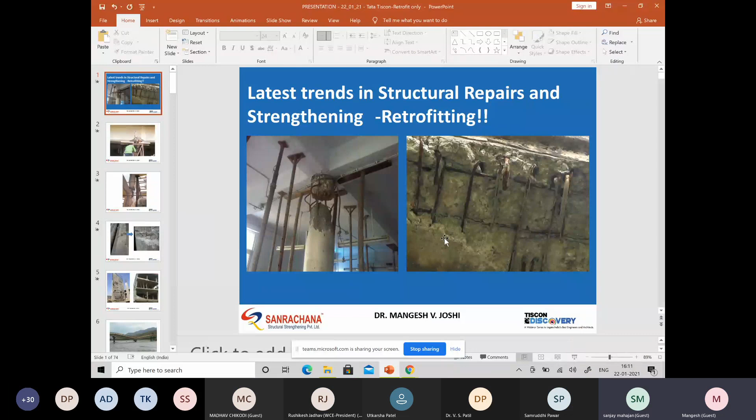Can you see the screen now? Yes, sir. So...

Structural repair and strengthening is the topic. I'll be talking for 45 minutes, focusing mainly on the strengthening part. We've been doing this work for almost...

Can you mute yourself like others? Hello? Please mute yourself, there's a lot of disturbance coming.

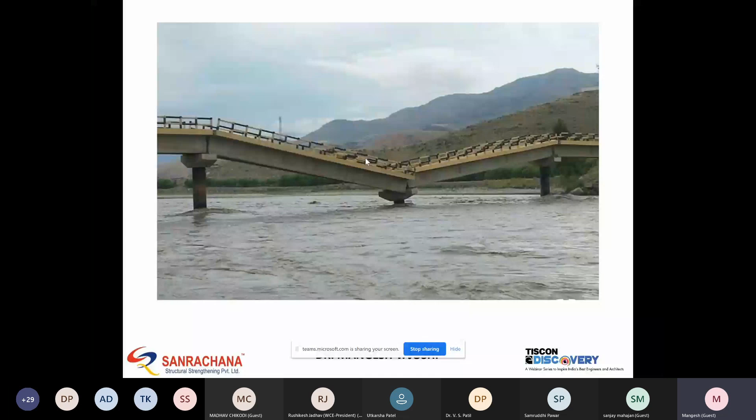So what comes to mind when you see this, and why does this incident happen, and what is common in all these photographs? Basically, one common thread in all these photographs is total negligence - meaning we are not taking care of or maintaining our infrastructure, or there might be some mistake in design. So there are different causes for all these types of failure.

Going back to this case - the structure was not properly maintained and there was overloading, so nobody checked the capacity before heavy vehicles went on the bridge.

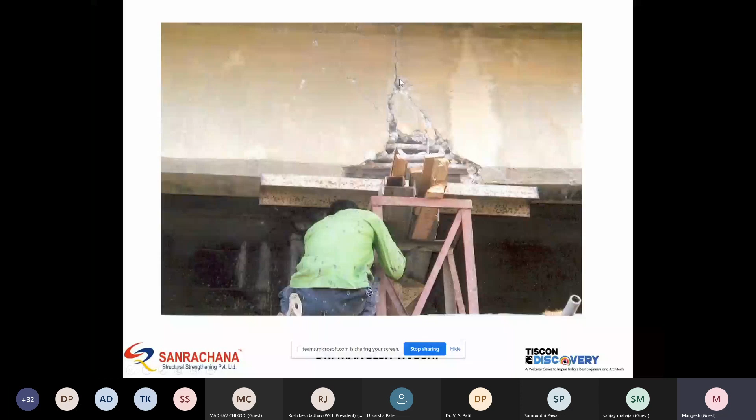In this case, you can see there are no cross-links here. Normally, as per good earthquake detailing, there should have been stirrups here, but you can see there are none. So naturally, it is failing at this location.

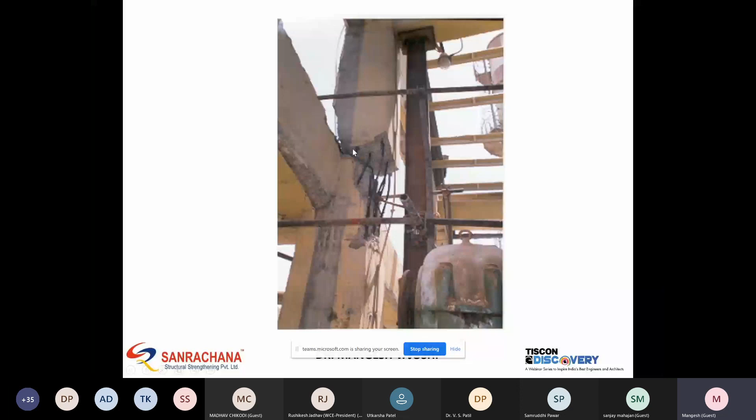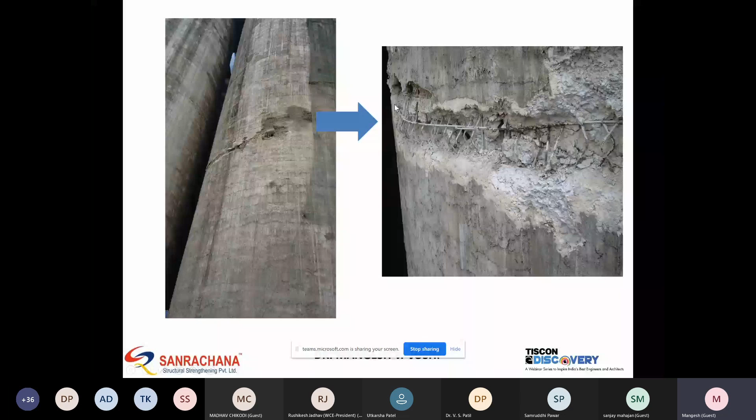In this particular case, you can see extremely bad quality of concrete, coupled with design issues, leading to this type of failure. Here again, bad supervision and bad quality control on the concrete led to this type of failure. And here, it is covering - again, inadequate design.

So what we are going to study here today is mainly why we need repairs and retrofitting. I'm skipping these two parts given the time - durability I'm not considering, because durability itself is a very elaborate subject.

We will discuss different strategies for repair and retrofit, and the most advanced updated strengthening techniques. I'll be talking mostly about case studies, because that way we'll be able to relate to the practical problem of how things happen.

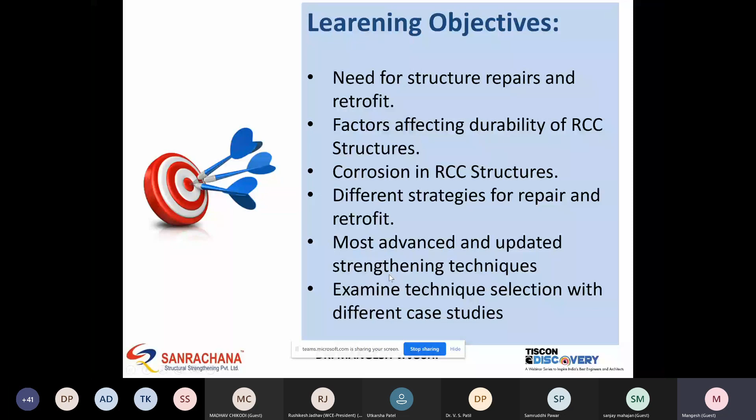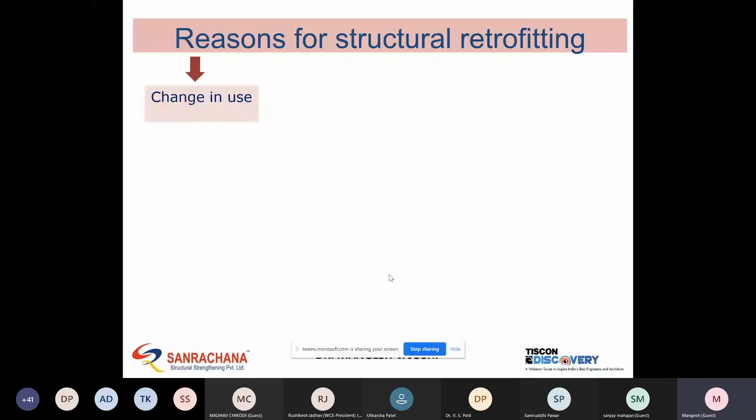So why do we need structure strengthening? There are different reasons. First is change in use, which might be for different reasons, mainly live load increase. Many times you convert a residential building into a commercial building, and by that there is an increase in live load, because for residential building it is 200 kg, and for commercial building it is 400. Similarly, if you convert a mall to a hospital, there is a change in importance factor, and accordingly your forces change.

In case of industry, there is always a rearrangement of equipment. If you put some heavy equipment which is beyond the capacity, so this can be done.

Seismic retrofit: structures which are not designed for current seismic codes can be considered. Or blast upgrade, meaning buildings which are subjected to, or which are posing a threat from blast.

Those buildings deteriorate because of corrosion, loss of section, cracking. Corrosion is keeping us very busy, because especially India has a long coastline, and because of that you see a lot of corrosion, and whenever a structure corrodes, it loses its structural properties also, and because of that there are many stability related issues.

Faulty construction: when I started in this segment, I never thought I may end up working on new structures, but because of the peculiar situation in the market and lot of structures and work happening around, naturally more work is happening, so mistakes are also equally happening. Sometimes there's missing reinforcement, incorrect reinforcement detailing, low concrete strength, issues with concrete mix. Sometimes you specify M40 grade, but at site you get M20 only after hardening, and demolition is not always possible there.

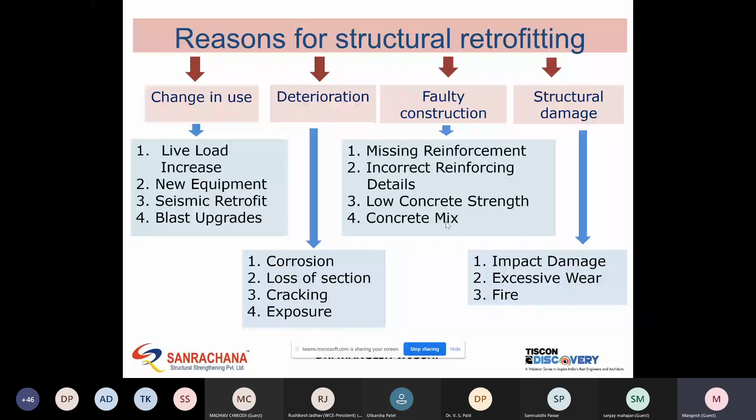I always say that designing a new structure is a very straightforward job, quite straightforward activity. You have a new construction, so you have a functional and structural demand clearly specified. You know for what load it has to be designed. You can follow the code. Everything is greenfield, you can start from scratch.

Before actual construction starts, you can do a lot of engineering. You can spend a lot of time with the architect, doing detailed engineering. You can come up with different economical options in terms of construction. And after doing this detailed planning, you go for construction. So it is very biased towards planning.

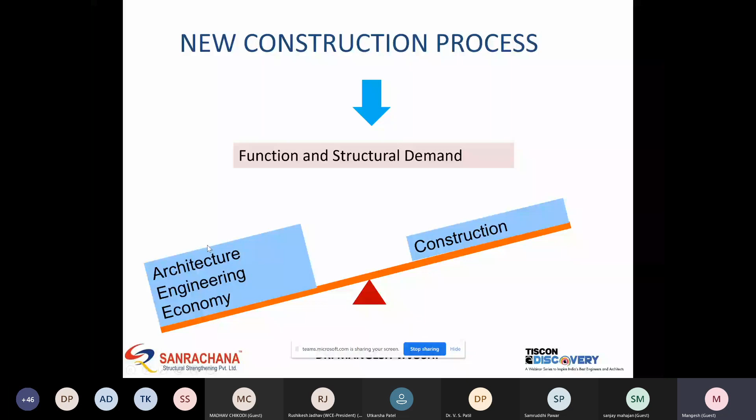But when it comes to retrofitting, you have an existing capacity, and from this existing capacity you have a new demand, and you have to achieve this through the process of strengthening. So from existing capacity to new demand - this process is strengthening. But it's not as simple as it looks, because it's quite complex and follows a very tedious path.

Because once your structure is brownfield, there are services, and we need to remove these services. We need to take a shutdown. So a lot of issues are there.

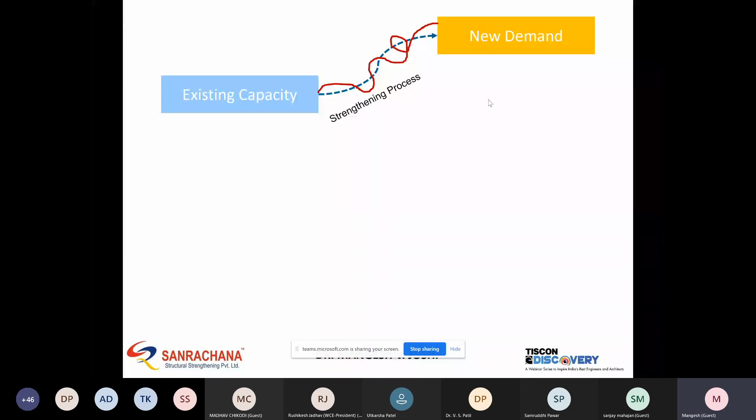So what happens in case of retrofitting? You need to focus first on constructability. Like yesterday, I visited a plant, and they told me that if they keep the plant shut even for one day, it will cost them 3 crore per day. So even if I can save one day of shutdown, I'm saving them 3 crore rupees. So we have to spend a lot of time on constructability.

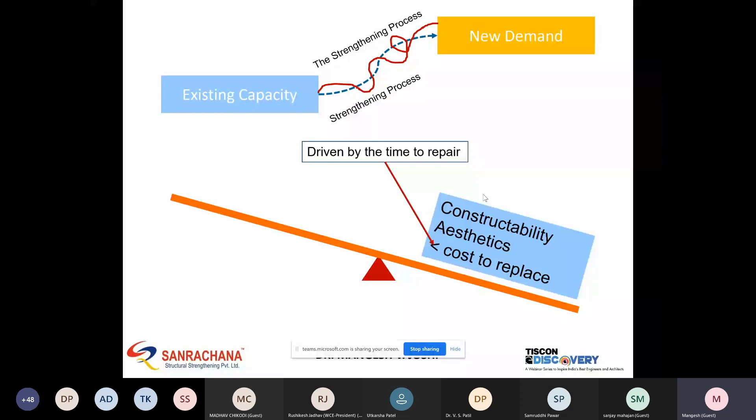As I said, it's driven by time to repair. Sometimes even your initial material cost is very high, but your shutdown cost is much higher than that, so your basic material cost doesn't matter. In this case, you have to spend time first at site, see the different aspects, the limitations, and then it should be supported - whatever you do should be supported by your engineering.

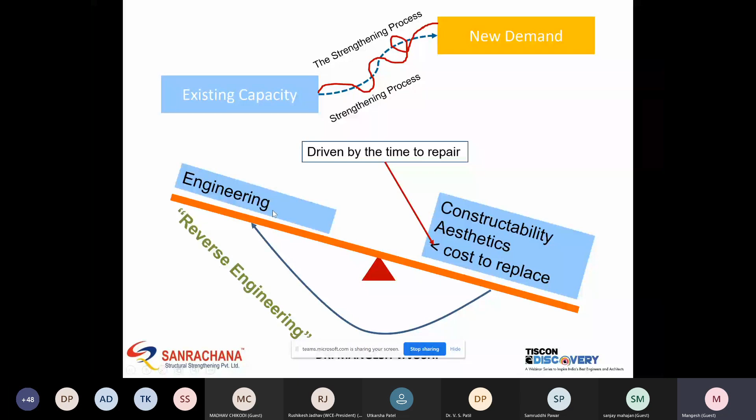So typically, retrofitting I call a process of reverse engineering, meaning you start from site and go to your office desk.

So as I said, I am mainly focusing on structural strengthening. Here are the different techniques currently available in the market. First is a very popular and very old method - supplemental steel and steel plate bonding. Then external bonding with FRP - now I will not call it a new method because I myself have been using it for the last 20 years. So this method has been in use for almost 20 years.

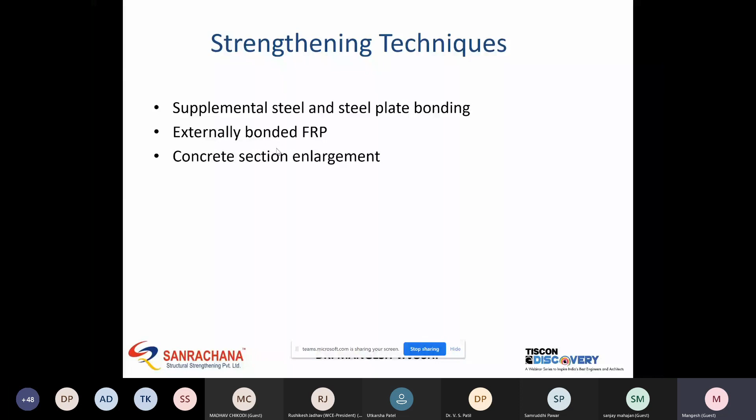Then concrete section enlargement, again a very old method called jacketing, in which you increase the area of cross section by adding additional steel and additional concrete thickness.

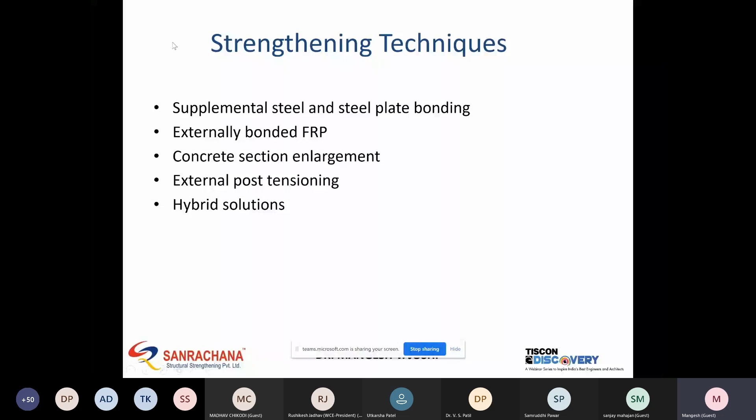External post-tensioning means, whenever you might have seen many bridges where external ropes are provided to take care of this additional load. Then comes the hybrid solution, which is comprising of all this mix. In the next slides, we will see the advantages, disadvantages, and mainly case studies of what all we can do here.

If you see the percentage use as of now in the market, FRP contributes only almost 50%, and the rest contributes the other 50% of the solution. But again, solutions are driven by site condition and different parameters which you are thinking of.

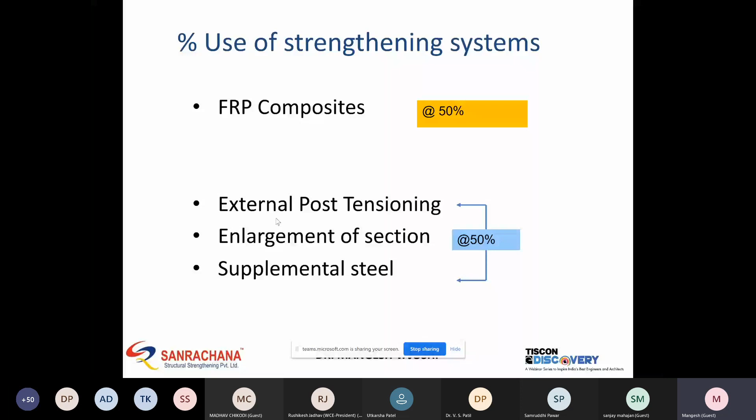Again, there are different approaches in retrofitting. The first approach is increasing stiffness, wherein you will increase the cross-section area or do the wrapping. In the second approach, you provide dampers, wherein you can reduce the exposure of forces on the element by introducing dampers, so that your structure element is not subjected to higher forces. The first is more of an active method, and the second is more of a passive method where we are reducing the load on the element.

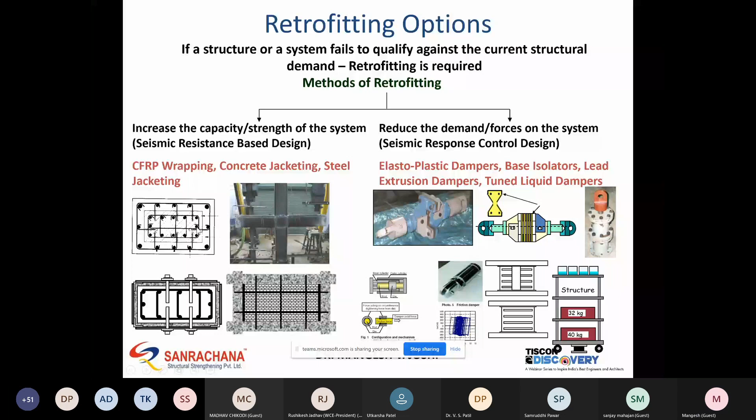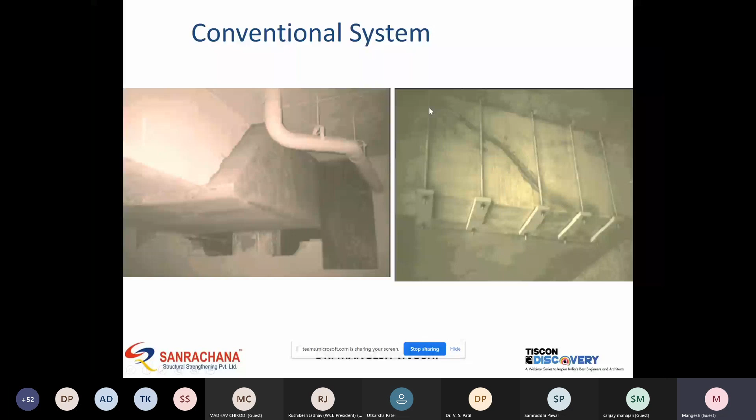Then there are different methods. In conventional methods, you can increase the cross-section area by putting additional steel and then concreting, or do external post-tensioning for this type of shear crack. But then we have our composite materials, and as I said, we ourselves have been using composites for the last 20 years, but it all started with the defense industry, because all your fighter planes are made of carbon fiber, your missile shields are made of carbon fiber.

Why carbon fiber in the defense industry? Because these are non-metallic fibers. Being non-metallic, radar cannot detect it, so that helps. Again, it is very light and strong, so it reduces the weight of aircraft to a great extent. Then for sports goods purposes, where you need light but strong materials. So all these materials started their use in the defense and sports industries.

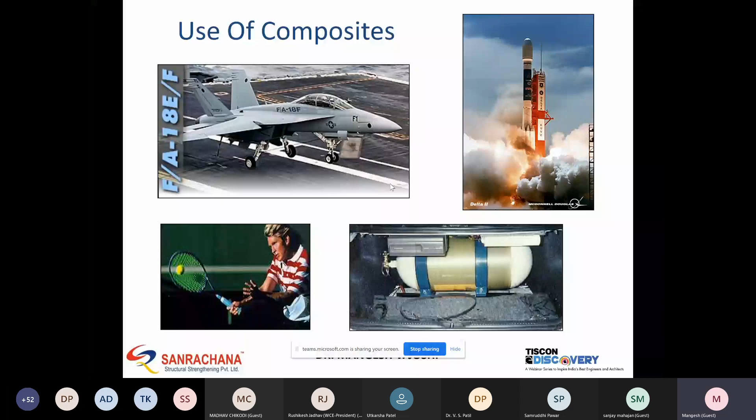As the market opened up and there was a huge supply of the material, they started using it in the construction industry also. Like composite, the best composite civil engineers know is RCC, where you use steel and concrete in combination. Like this, we also have a combination - we have a fiber phase and a matrix phase. In fiber, we have different types like carbon, glass, aramid, boron. And in resin, mainly thermoset resin. If you mix this fiber with resin, it forms the composite.

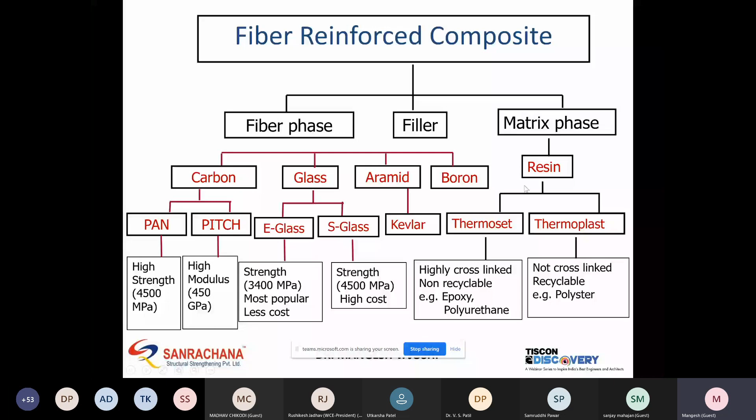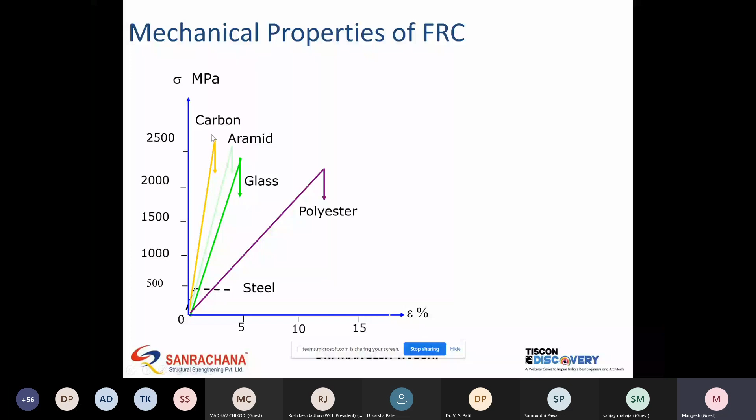If you see the mechanical properties, it is very peculiar. On the x-axis there is strain, on the y-axis there is stress. If you see the stress-strain diagram of steel, it is very bilinear - you can see it here, elastoplastic material steel, once it yields, it goes into this plastic zone. So it doesn't break at this point, it yields before it breaks. Unlike that, all these materials are elastic, meaning they don't have a plastic zone. In the case of carbon, this breaking point and yielding point are the same - it doesn't have this longitudinal plateau. So at material level, these materials are brittle, but you can see its strength is much higher, as I will show in the next slide.

One more property is its orthotropy. Whenever you design an RCC element or steel element, you consider that element as isotropic and homogeneous - meaning your properties are the same in all x, y, z directions. But that is not the case with composite - it is a highly directional material. All fibers are oriented in one direction, making it very strong in that direction and weak in other directions. So you have to be very careful at the time of application, in which direction you need to orient your fiber. This is called unidirectional fiber, UD fiber.

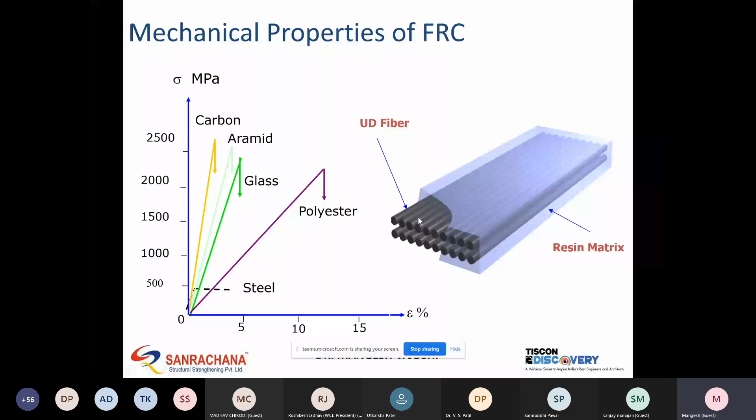These are available in different forms, like this type of cloth sheet, where you have a complete cloth of say 500mm wide and 100 meters long, and once you mix it with this epoxy, it will form a composite. Or you have ready-made profiles of fixed width and thickness - these are factory-made laminates, and you can directly paste this composite like a steel plate, or bolt it to concrete.

How can we strengthen the element? First, for flexural enhancement, you can put the fiber in the vertical direction for a column, and for shear you can wrap with 90-degree orientation. If we require both flexure and shear, we can wrap in both directions.

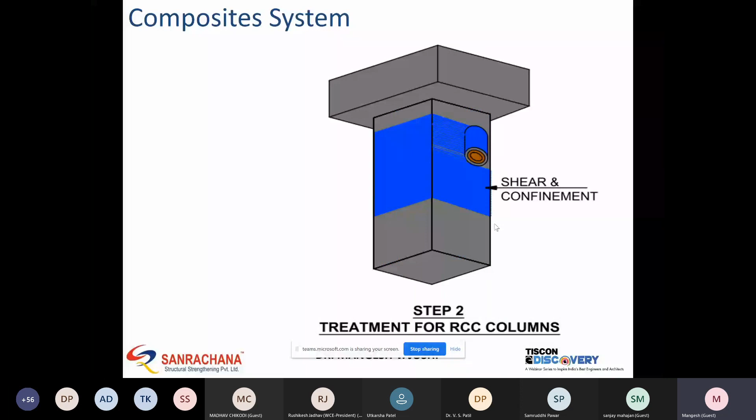Similarly, for beam, you can wrap in this horizontal direction for flexure. For shear, you have to put the main fiber direction parallel to stirrups, because your shear force is going to come in this vertical direction. If you have both issues with flexure and shear, you can wrap in both directions.

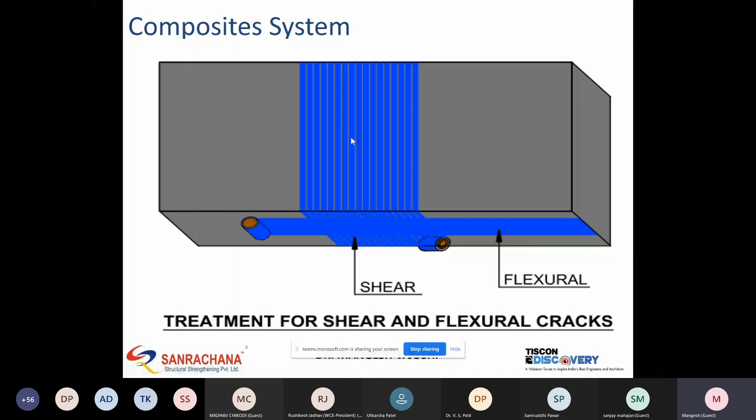Similarly, for a one-way slab, you can wrap in one direction. If it is attracting some negative moment at top, you can wrap from the top also. If it's a two-way slab, you can wrap in both directions, X and Y.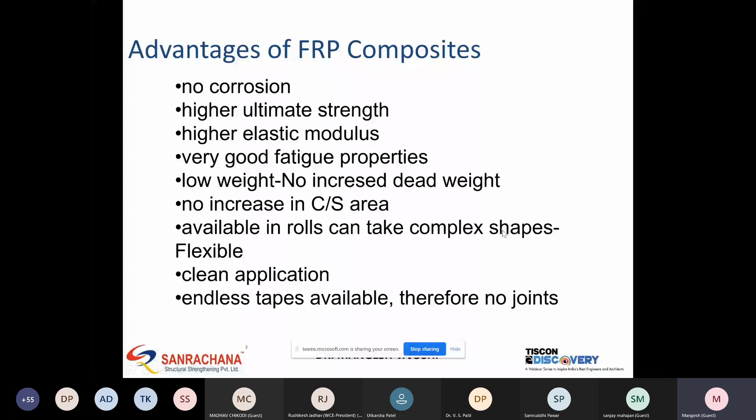No increase in cross section area, available in rolls so it can take complex shapes, being flexible, and the application is fast and clean. So if you see how it increases the strength for a column, again on the x-axis there is strain, on the y-axis there is stress, and this is part of my PhD work—I still am using it.

As you keep increasing the number of wraps, you can see the strength gain increases. This is one wrap, this is two wraps, four wraps, and eight wraps—you can see there is a huge increase. Not only that, look at the area under this curve and the area under this yellow curve. Area under the yellow curve is much more than the area under the black curve, indicating energy dissipation capacity. So by confinement, you are introducing a lot of energy dissipation capacity also.

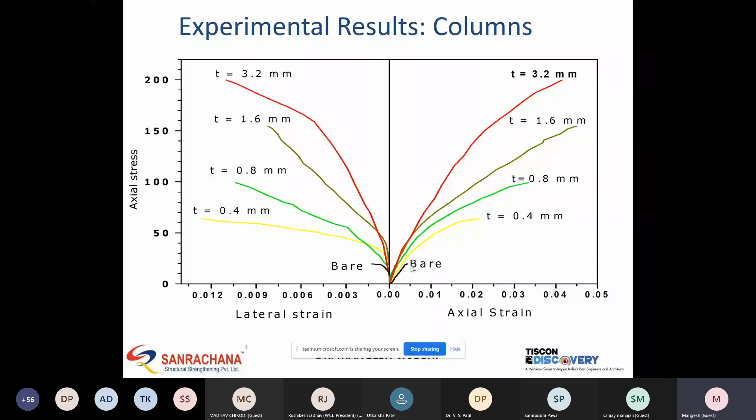Similarly, for beam—this is your regular RCC beam, and you want to increase its bending capacity. So what you are doing is putting this type of laminate, 0.3 mm thick and 200 mm wide, below the beam, and you can see it increasing the bending strength.

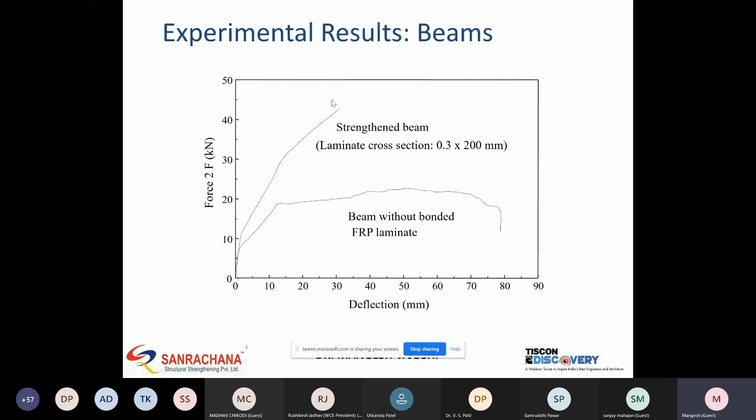Then I will come to case studies. This is one of my first works—you can see these are circular columns, and the client wanted to create a strong room over this. This building was constructed in 1942; it was a heritage building, so they could not demolish and reconstruct it. So whatever additional capacity we needed, we wrapped this column and increased its capacity.

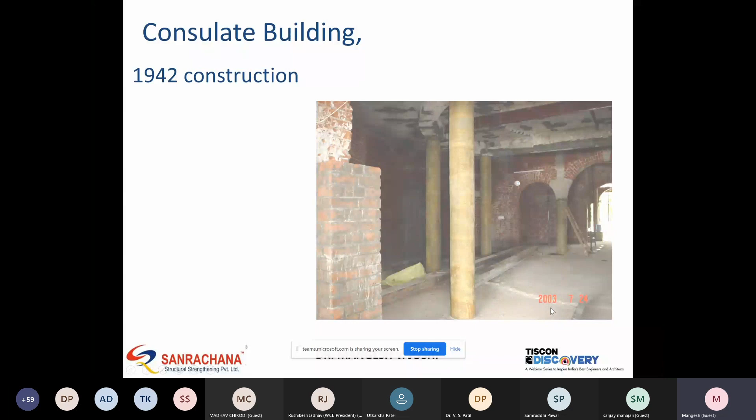You can see that this work was done in 2003, and it is still very much referred to and used.

Then this is a podium slab, wherein they changed the use of the structure. It was a residential building, so they converted the ground floor into a parking lot. Even the first floor they converted into a parking lot, because they got some additional FSI and put an additional building, an additional floor, at the top. So this slab, which was designed only for residential loads, had to be strengthened for vehicular load. You can see that we have strengthened this.

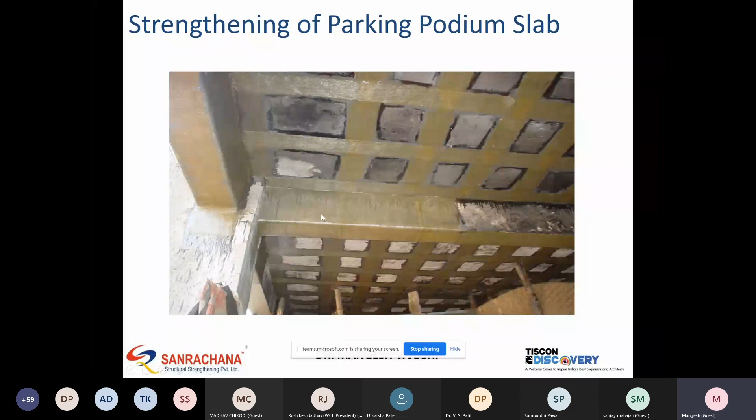It's a two-way slab, so we wrap in both directions, and then we wrap in the shear zone as well as in the flexure zone.

Then this is a case study of IFFCO Kandla. In 2001, almost 20 years back, this was one of the first major applications in India, when there was a huge earthquake in Gujarat—precisely 26 January 2001. This type of damage was there: this is shear damage, and this is a typical plastic hinge failure because of non-confinement.

This is a typical soft story—this was a ground floor column, and as it was not laterally resistant, it got sheared off in this manner.

It was a fertilizer plant, so phosphoric acid spillage was very common. And again, this plant was not insured for loss of production—it was insured for earthquake damages, but not for loss of production. So they wanted to start production as early as possible.

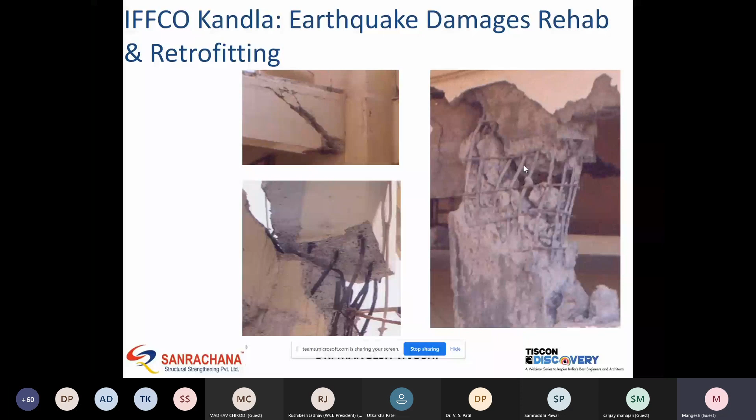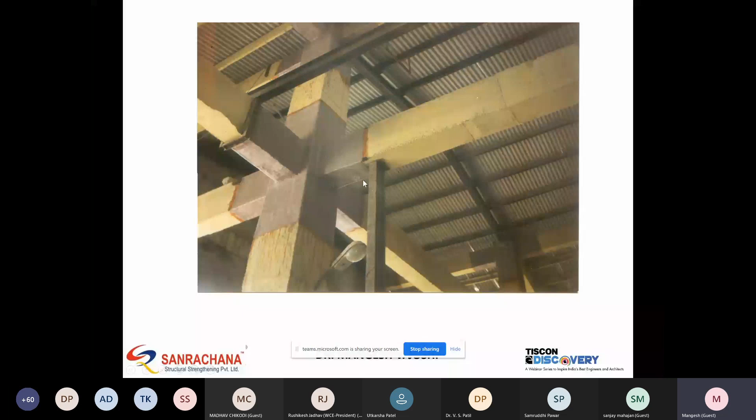So there we used glass and carbon fiber wrap to a great extent. You can see all this material, mainly at joints, was wrapped using composite materials. Then this is a case study of cold storage.

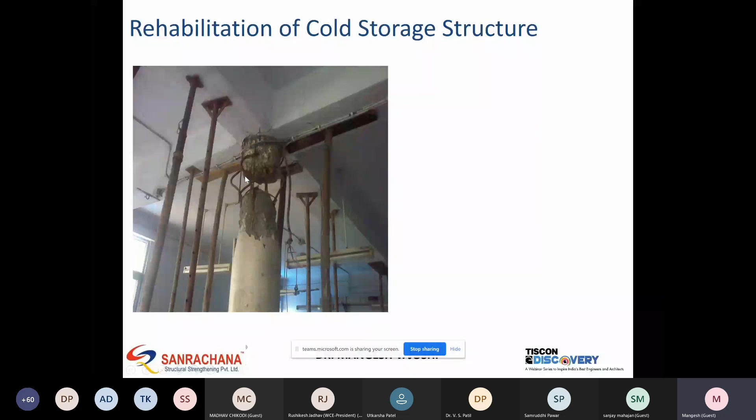You can see this failure. These bars are completely bulged, but at the same time you see the beauty of ductility of steel. Though it has deformed a lot, it has not cut. It has not got cut. So it's quite stable and very much there. So this was the case.

RCC cold storage structure located in Navi Mumbai. Intermediate floors were designed for higher load because it was mainly used as a storage building, 1500 kg per square meter. But top floors were designed only for 400 kg per square meter. And what happened during the rain?

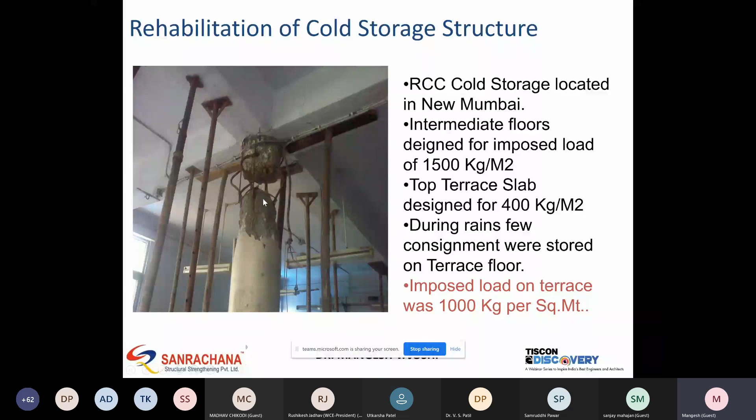Whatever material lying in the compound was kept on terrace and was covered with tarpaulin. But in the process, they missed the fact that they had loaded almost 1000 kg per square meter, and this floor was not designed for that type of load. So you can see these beams are cracking, these columns are failing, and because of this overloading, this failure happened.

So this was a solution. Structure was immediately supported by putting additional props. Load on terrace was removed. Additional steel bars were provided. Grouting of low viscosity epoxy was carried out.

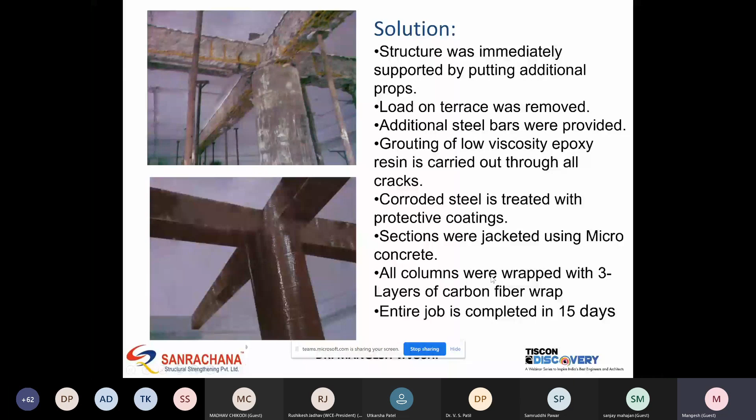Corroded steel was treated with protective coating. Sections were jacketed using micro concrete, and all columns were wrapped with 3 layers of carbon fiber wrap. So the entire job was completed in 15 days.

Then this is a case study of a chimney. You cannot make it out by naked eyes. So this is a chimney, almost 2.9 meter diameter, and height was 60 meter. The contractor which was doing this work was using slip formwork for the first time.

So while casting only, there was 273 mm sway in this direction. It was a bit of sway. So it was not exactly vertical. It was casted as inclined only.

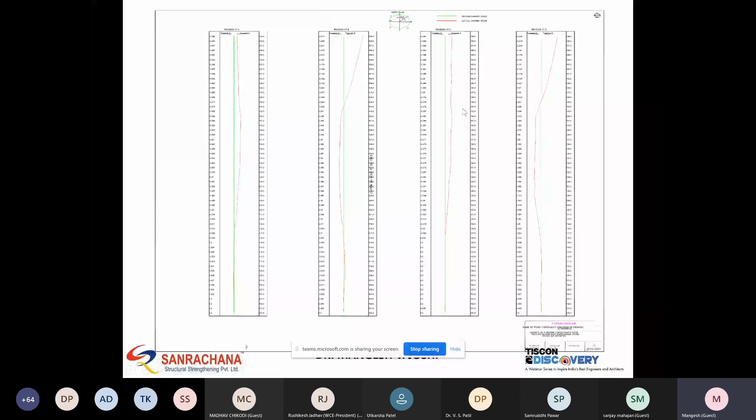But because of that eccentricity, for modeling, we need to first find out the eccentricity in all quadrants. So we carried out total station survey, and through that we found out the eccentricity in all the quadrants. Based on that, we modeled it with FEM with that eccentricity, because otherwise this chimney would have been a simple axisymmetric problem. But this inclination made it a bit complex.

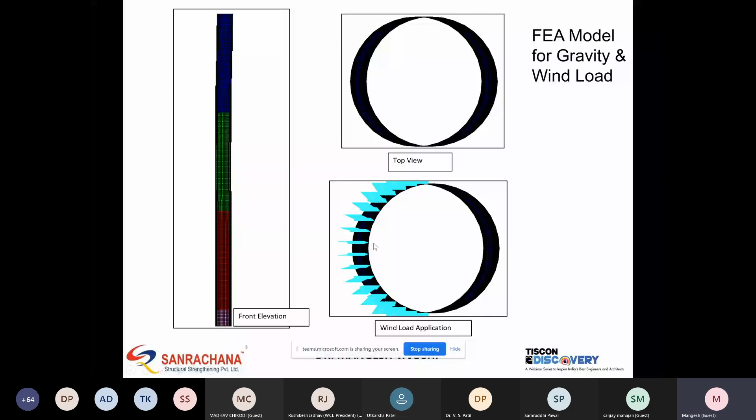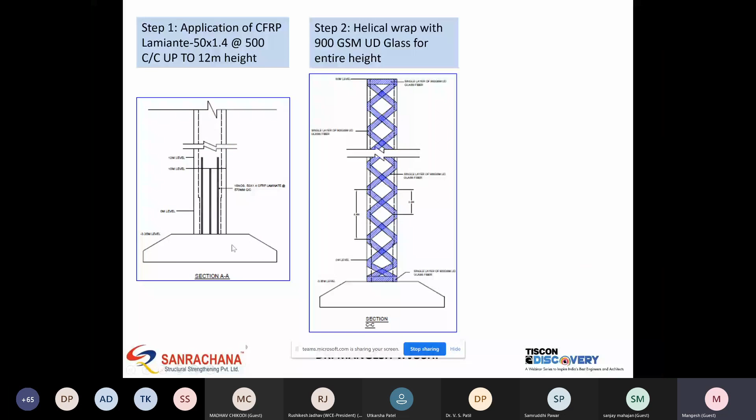So with this inclined nature, and after putting wind load on it, we found out what additional stresses are coming at the base, and what additional tension is coming at the base because of this eccentricity. Then we provided carbon laminates at the bottom and helical wrap, and at the bottom again we wrapped with 0-degree orientation.

So these are the photographs you can see. This is the entire chimney. Up to the bottom we provided carbon laminate followed by wrapping, and at the top we provided helical wraps.

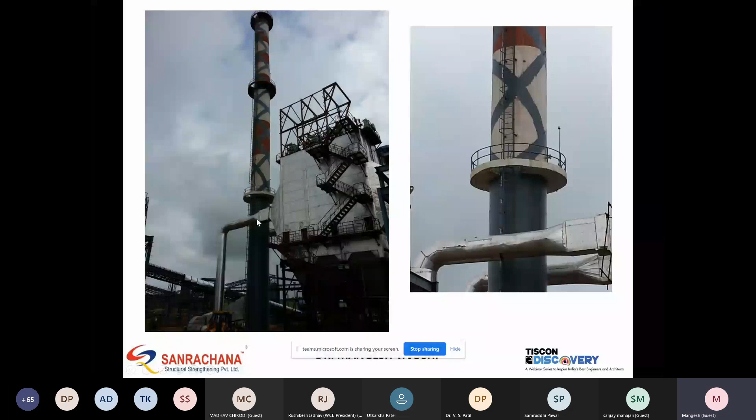Then again there is a case study of a silo, RCC silo, which I discussed in the beginning also. So this was a coal storage silo for sale, and suddenly after putting it to use within 3 weeks there was this collapse. Everybody was worried then because it was a new structure, and still it underwent this type of failure.

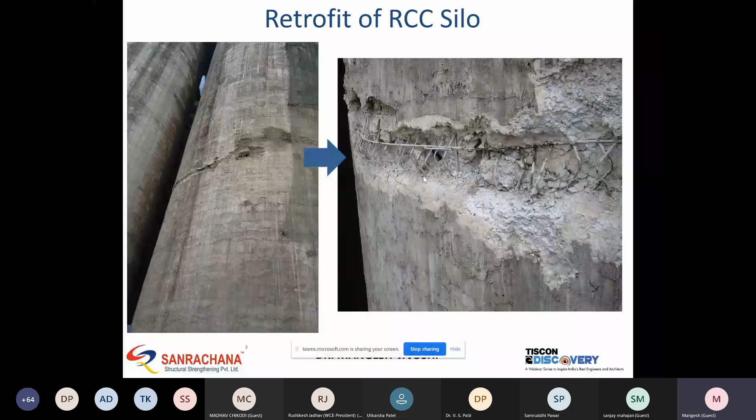And it was quite a severe failure. You can see that from inside also there are through and through cracks. If you see this silo, there was a cluster of silos, meaning a bundle of 4 silos together, a multi-cell silo we call it. Out of these 4 silos, this one was showing distress.

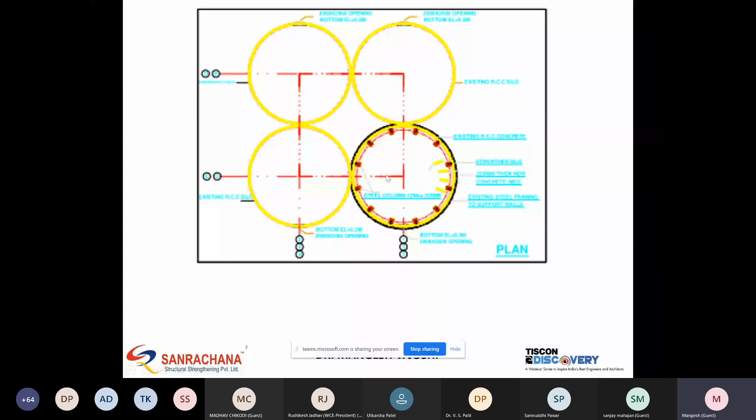So what are the primary reasons for failure? First and foremost is a handling issue with multiple cell slip formwork. For the first time, they used slip formwork for this multi-cell, meaning the entire formwork was casted in one go in stages. They used to cast concrete from here, fill this, go here, fill this, come here, and then start pushing it up.

But during the process, they could not control the initial setting time of the concrete. So at few locations, concrete used to get settled, and at few locations, concrete used to remain unset. And when you try to push this unset concrete, it used to create a lot of problems.

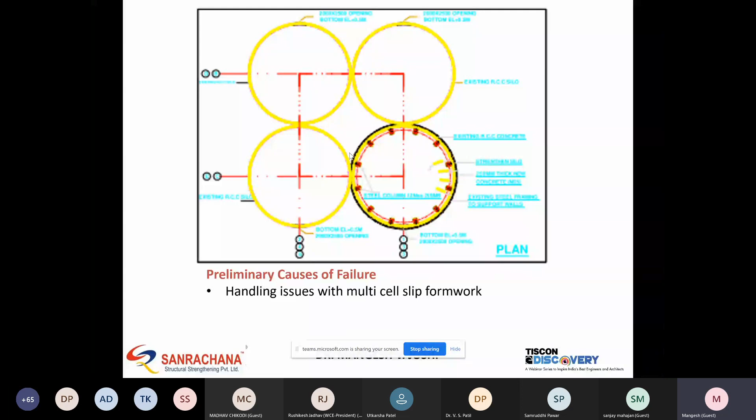And then bad quality of concrete, because they optimized the design so much that the silo thickness was hardly 200 mm. So in that congestion, the concrete had to be really fluid, but they could not maintain that type of flow of the concrete, and that created a lot of honeycombing in the concrete.

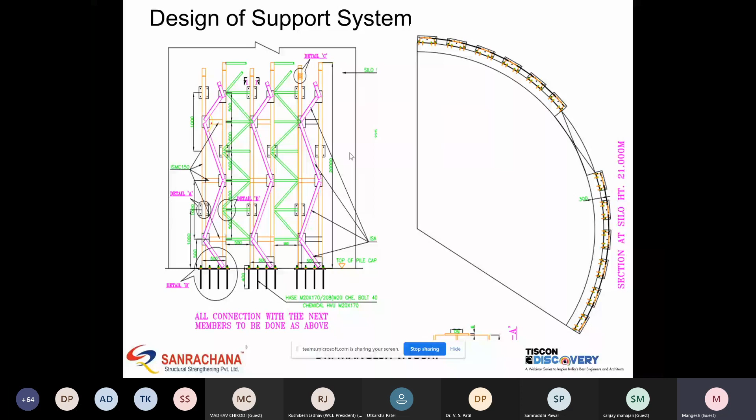So first thing was supporting, because everybody was worried about how we will support this silo. But I could find this type of stanchion lying in the yard there, being a steel plant. So initially we supported this failure by providing this type of supports.

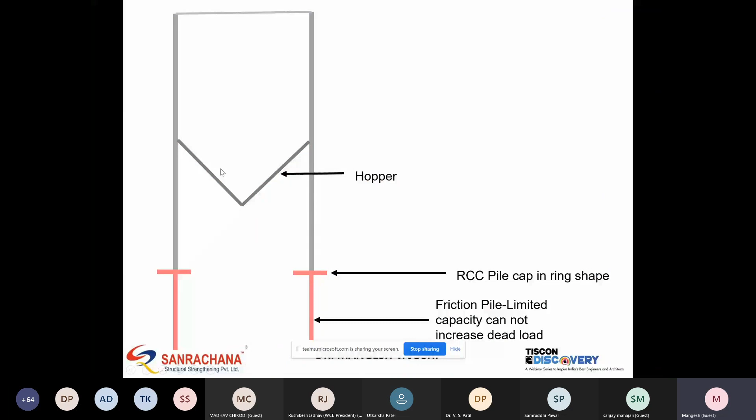Then this was the arrangement. You can see this was the friction pile, over the pile cap, and over that there is the silo wall, and this is the hopper. So this was the arrangement, and this was the retrofitting arrangement then.

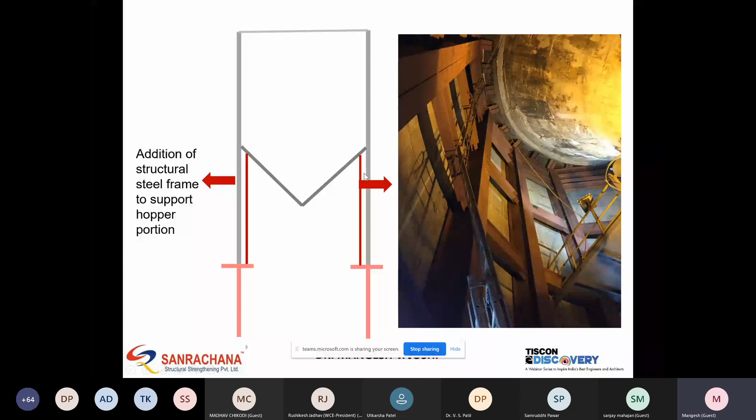So what we did first, we relieved the entire load of this conical shell by introducing a steel frame inside, which relieved the load completely. Externally, we provided RCC jacketing, and from top we did FRP wrapping. Here, if you see, we did jacketing, and then from top we did FRP wrapping.

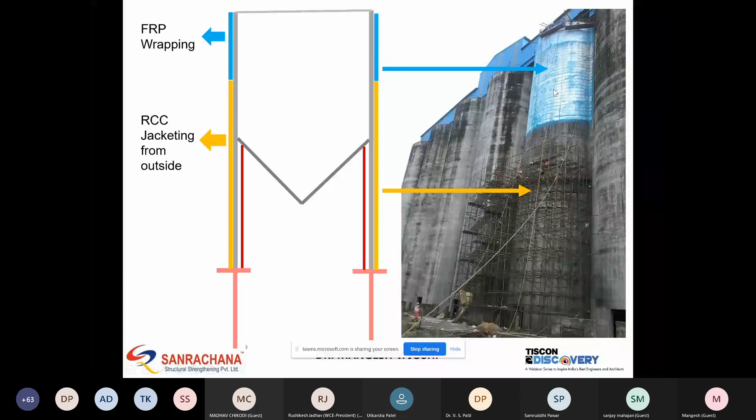Now you'll ask me that I could have easily jacketed the above portions also. But because of that additional jacketing, there would have been extra dead load, and my friction piles were failing for that extra load. So I cannot increase the load. So to control the dead weight, I used FRP wrapping at top. Anyway, stresses were less at top, so I used this approach, and that's how it was finished.

So this is the project summary. Hybrid approach is successfully followed to restore the silo. All three methods, you can see, you cannot fix on one particular method, or say this method is good, that method is bad. Whole thing depends on the problem you are at hand. So we used all three methods here: structural steel, RCC jacketing, and FRP wrapping, which was required for the problem.

And the entire work was completed in 90 days. And yesterday only I got a call that the rest of the three silos also are now showing signs of cracking. So we may have to repair those three silos also. So the structure is brought back to service successfully.

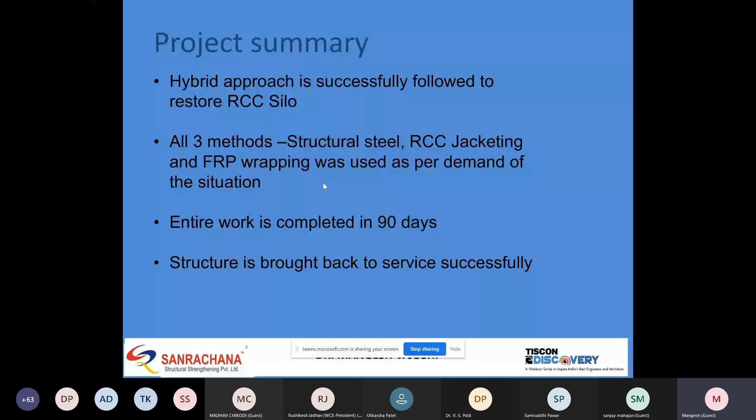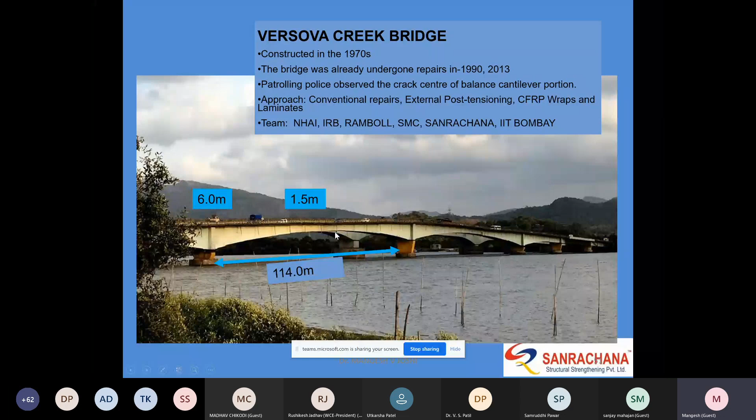And it connects these two major states, Gujarat and Maharashtra. It's the only link. And because of cracks in this bridge, heavy traffic was not allowed, and because of that, huge traffic snarls were there, and it was in news for wrong reasons. So there used to be huge traffic jams on this particular bridge.

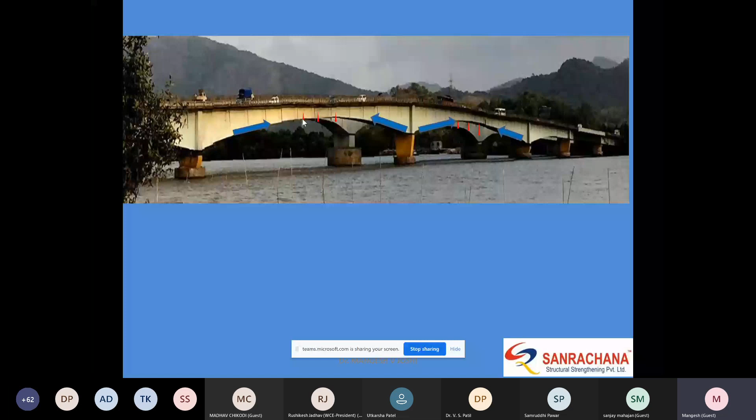So as this was the condition, these were the cracks here, and then we decided that we have to introduce compression here, because it is failing exactly at this location because of tension. As you can see, those were huge tension cracks there, and that's why it was decided to do external post tensioning by introducing this type of external pre-stressing tendons.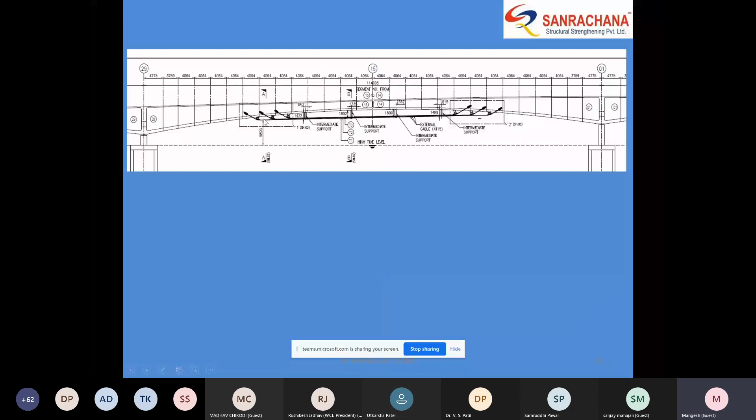So this was the arrangement of tendons. You can see 1, 2, 3 tendons on both the sides were introduced. And this was the detailing. This was the shell wall. So you can see this, it's going inside and out both. So these are the details of tendons.

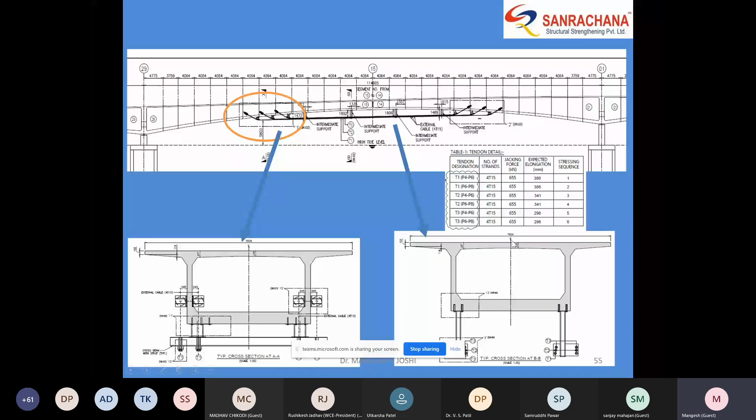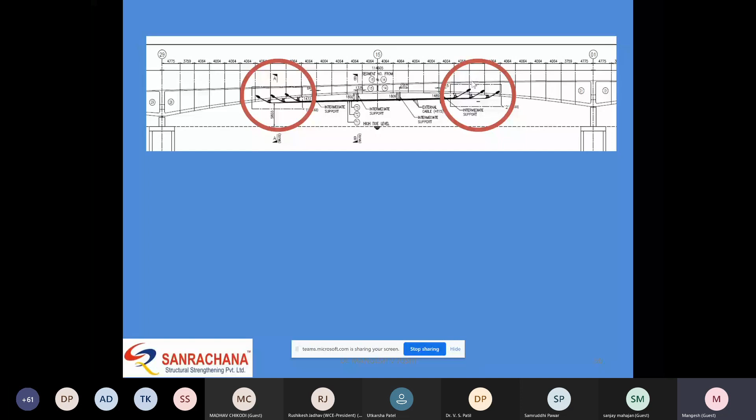But what was the problem when we were doing post tensioning here? Concrete at these locations was very bad. We call it the anchorage location, and normally at anchorage location, stresses are maximum. So at this particular anchoring location, it was getting failed. So concrete is failing under additional stress while pre-stressing. So we needed to strengthen those areas locally to take care of these additional stresses.

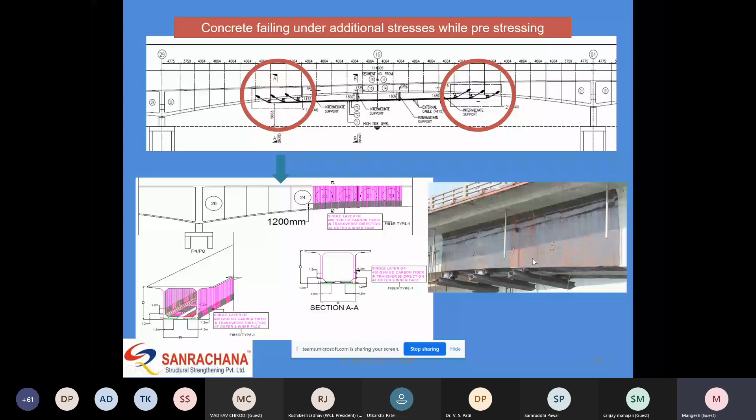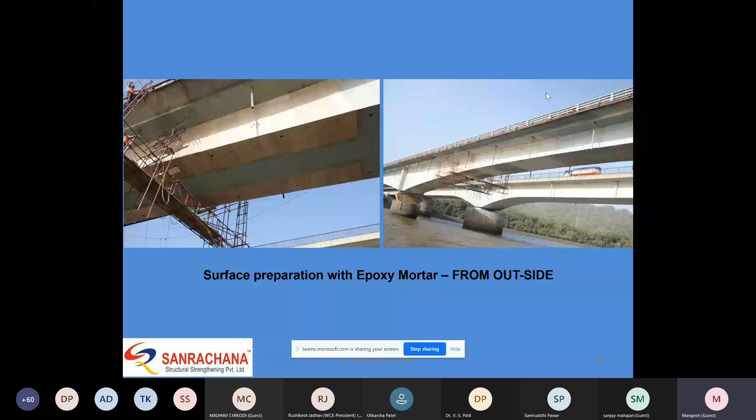For that, we used carbon fiber wrap. So you introduce this type of carbon fiber wrapping like this, inside, outside, and at bottom. In spite of this external post tensioning, under live load, it was showing additional tension. For that, we had to put carbon laminates also. So we cannot put formwork here, so we had to erect this type of gantry to facilitate the work.

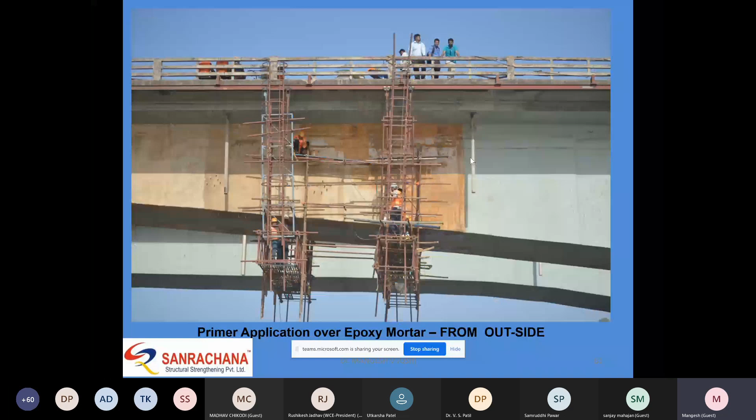So inside also we had to repair the section. So inside we did epoxy mortars, and these are the jacking locations. So before actual jacking, we introduced this type of carbon fiber wrapping in X and Y direction.

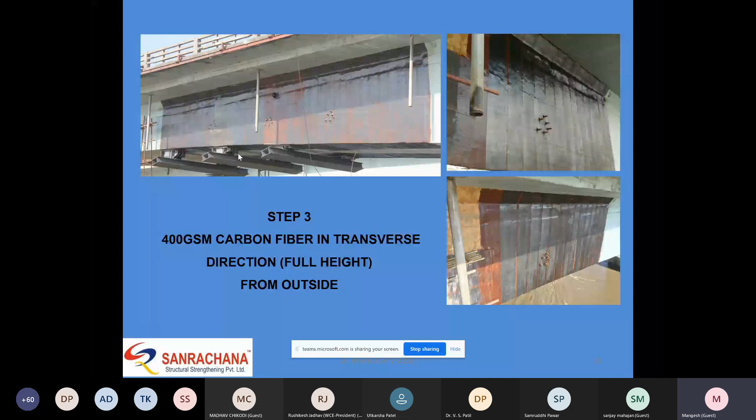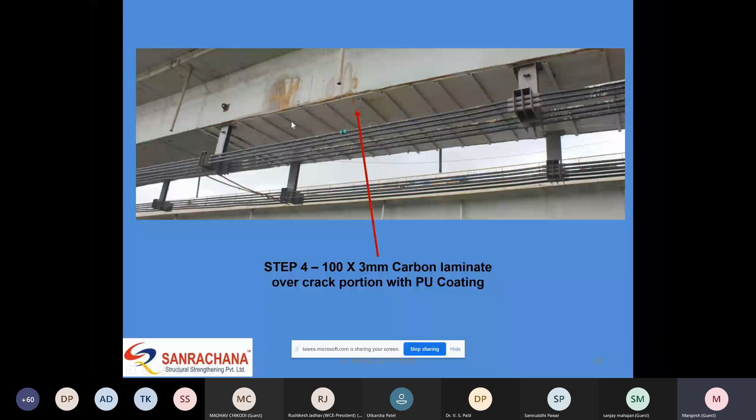This manner, entire wrapping. And then for bottom we had to provide carbon laminates. So for that we prepared the surface, and provided this type of carbon fiber laminates. And then once this laminate was applied, we did this external pre-stressing. These are the end anchorages, and these are the pre-stressing. So these are the final retrofitting scheme over this creek.

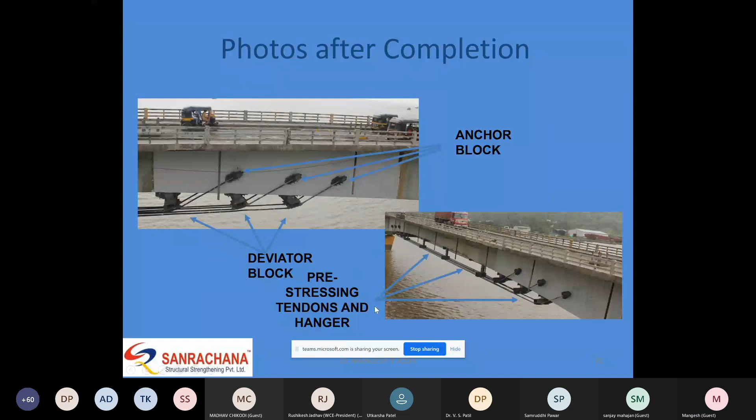So these are the anchor blocks, these are the deviators, and these are the tendons.

So this is the final bridge after strengthening. This bridge job was also finished in 15 days only. Everything was planned properly, and the actual job was finished in 15 days. So this was the last case study.

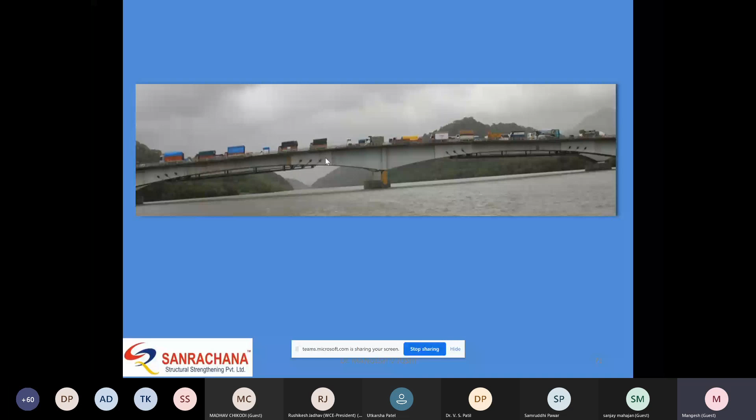So I'll just summarize my work. Repair and retrofitting process is the process of reverse engineering. As I told you, we have to do a lot of site investigation before we actually go onto site. Selection of retrofitting scheme will depend on site condition and time, cost, and budget.

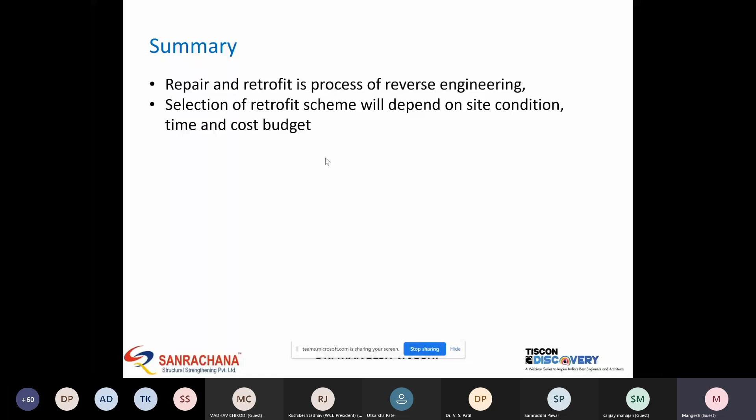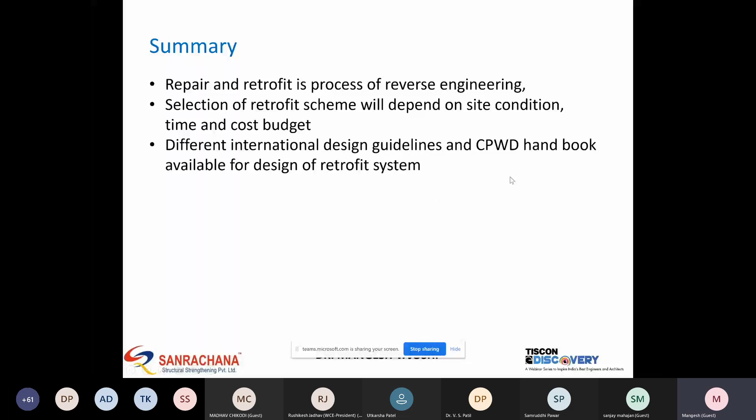Different international design guidelines are available, and CPWD handbook is also available, so as a student you can refer this to learn. You can refer further material as well. These are reference materials available, so you can refer this for additional study.